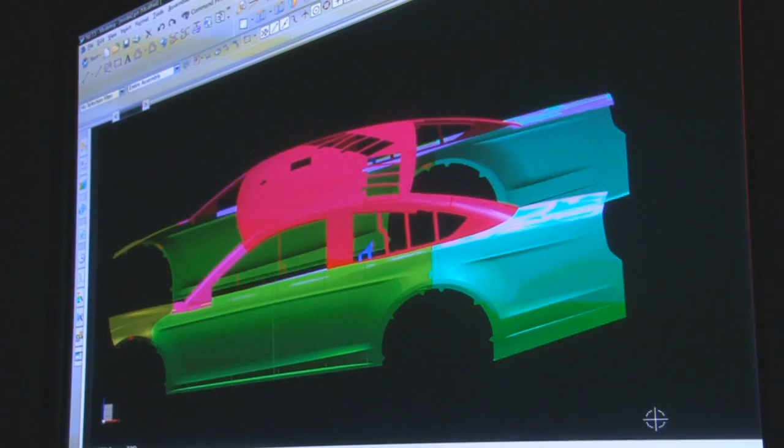What we're doing for the new Ford entry in NASCAR, the 2013 Ford Fusion, is making body panels, all the metal body panels for the program. What we do is we receive math data from Ford telling us what they would like the parts to be. From that, we will go through our process where we develop our dies. We then pour the dies and cut the dies, assemble the dies, and then we take the dies into our press room where we'll actually press out the parts.

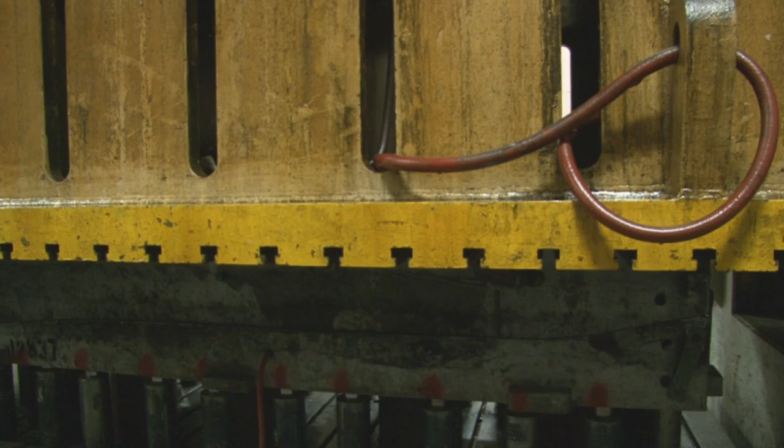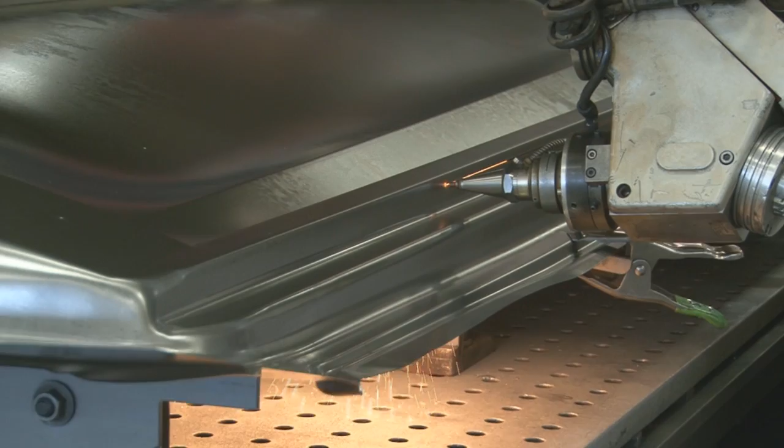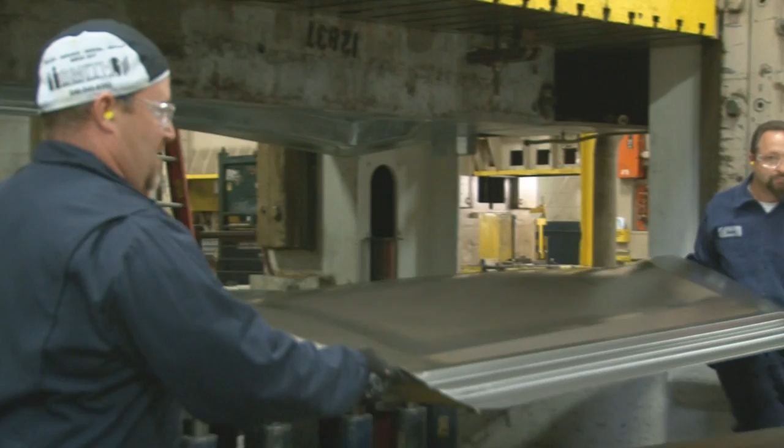From there, we'll take them to our lasers and we will cut all the excess material from the parts and ship those parts as finished parts. Because the car was more production-like, we were using production suppliers that we use across Ford. Two of them are Roush Industries that does our carbon work, and Quality Metalcraft that does the sheet metal and sheet metal stamping. These guys have both been partners with us in NASCAR and production for many years, so we've got a lot of great confidence in what they do.

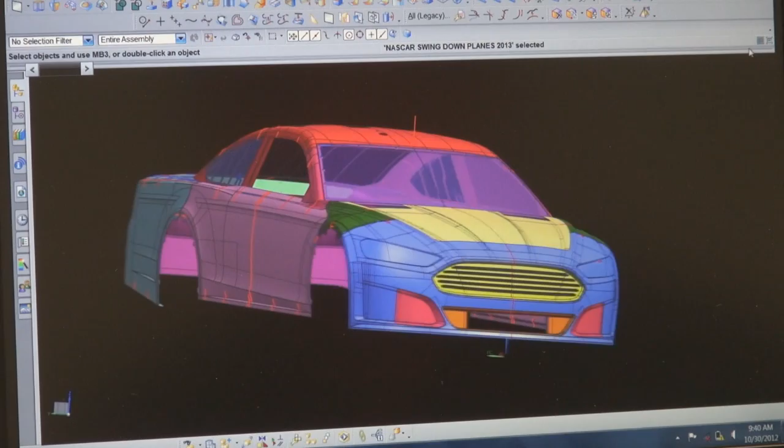A lot of the work was done on the Class A surfacing aspects of it, where they take raw clay picks or white light scans, sweeten that data up to make the surfaces nice and flowing and pretty, and then I take it from that point and add in all the manufacturing and assembly requirements that those parts need, again, to make the vehicle come together.

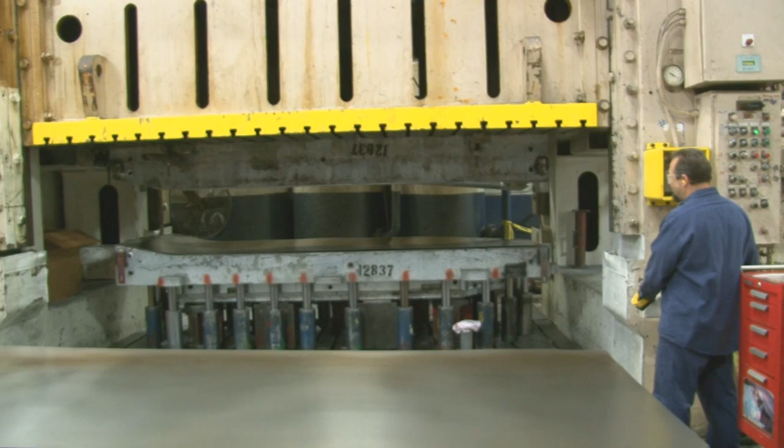So some of the steps that we took, obviously you've seen some of the other features that we've done where we had the design community engaged to where we got the look of the car, and we've got the aerodynamicists, so we got the performance of the car. Now we took that combination, got together with the engineers and the stamping engineers to make sure we could physically manufacture that. Well, it's a lot more exciting being involved up front and, as you say, with a lot more of the styling features that generally you do not see in the race cars.

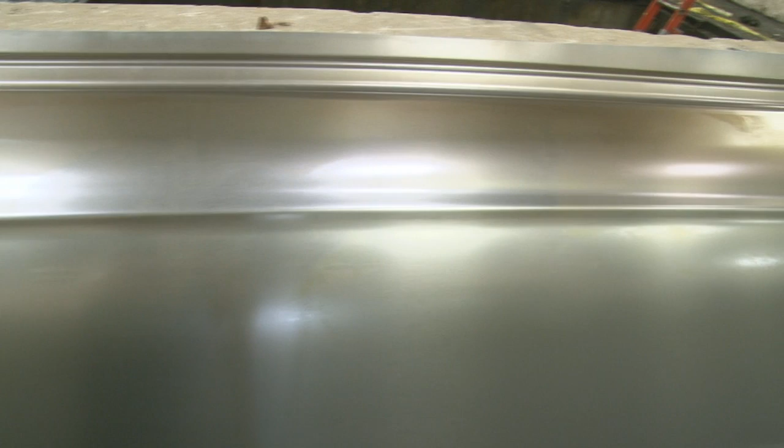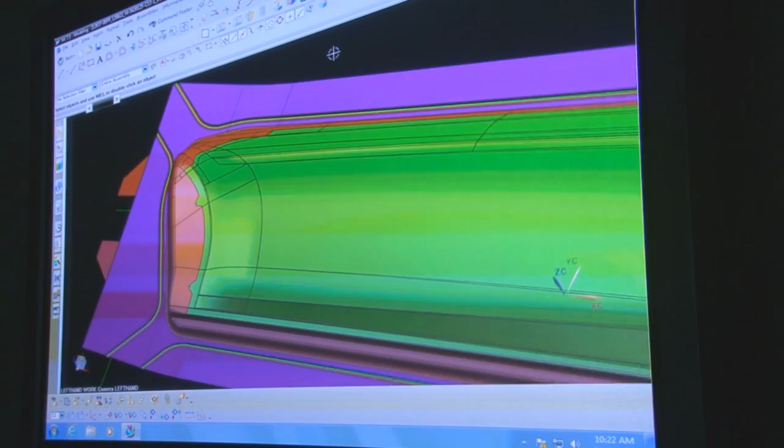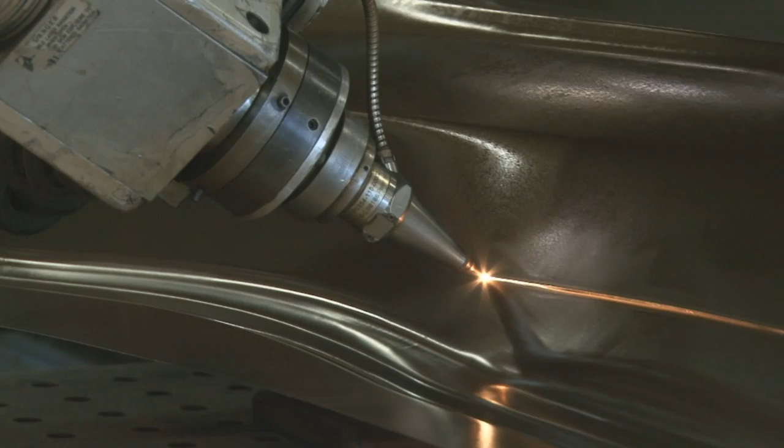The challenge now that there's a lot more features and styling features is ensuring that they are manufacturable. And again, working hand in hand with the product designers: this is what you can do, this is not achievable, this is achievable. The new Ford Fusion had to go through extensive engineering to develop the whole sides of the car, which in the past we didn't really have. They were flat panels. So because of the complexity of the parts, there was a lot more upfront engineering, the time that was taken to develop the product, which at the end of the day, I think it came out perfect.

The difference on this version of our NASCAR product for Ford is that this time we're following very closely with the production vehicle for Ford, the new Fusion. So we're right up with them. Our production parts are going to meet the process at the same timing as the production vehicle. And so it's a really unique opportunity. Everything that we've done previously has been a little bit different. It hasn't been modeled so closely to the production car. So we're really excited about that.

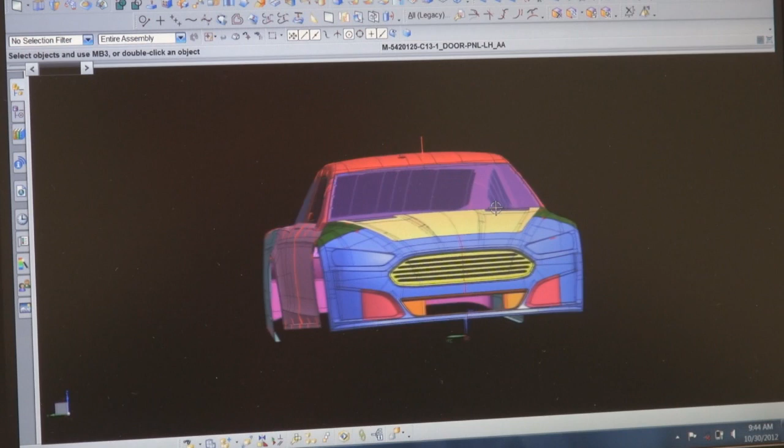You know, the 2013 Fusion has a lot of characteristics in it. And also NASCAR is working very hard to make templates that'll hold those tolerances in tight order. So we needed our suppliers to work in very tight constraints so that each piece is ready to go to the racetrack immediately. And so in working with the teams and the manufacturers, we were able to get the tight tolerances that we need to race for this 2013 season.